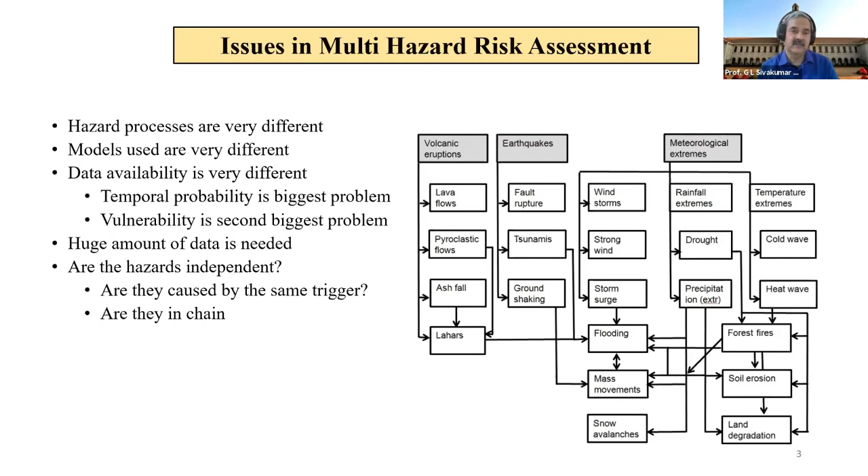There are also some issues like, are they independent? Are they caused by the same trigger? I will give an example. Are they in a chain? So there are some issues that we need to talk about.

So people will say that suddenly, whoever has GIS maps or some exposure to geographical information comes up with a lot of maps, which is quite good, because to capture that at different scales, we need them - to understand how many people, how much of the population is exposed.

And we always look at risk, right? So risk is actually expressed in terms of the hazard, and then the vulnerability, into amount. So, for example, you can talk about risk due to COVID - how many people are exposed, or how many deaths are happening.

So we know that COVID is a hazard, so you don't go out - the government of India has given so many guidelines. But how many are vulnerable, like people who are going out to stay outside or traveling a lot - are they vulnerable? And then the amount - how many people are exposed to that, or what is the loss. In fact, it can be expressed like, if this happens, how much is the cost of hospitalization, or if you're talking about a landslide, how much is the cost of reconstruction, repair, and all of that.

Our objective would be to reduce the risk as low as possible. That's why we call it the ALARP principle - we use it in many countries like Hong Kong and many places. Even in dam analysis it is there: risk should be as low as reasonably practicable. So in this context, we need to develop risk curves.

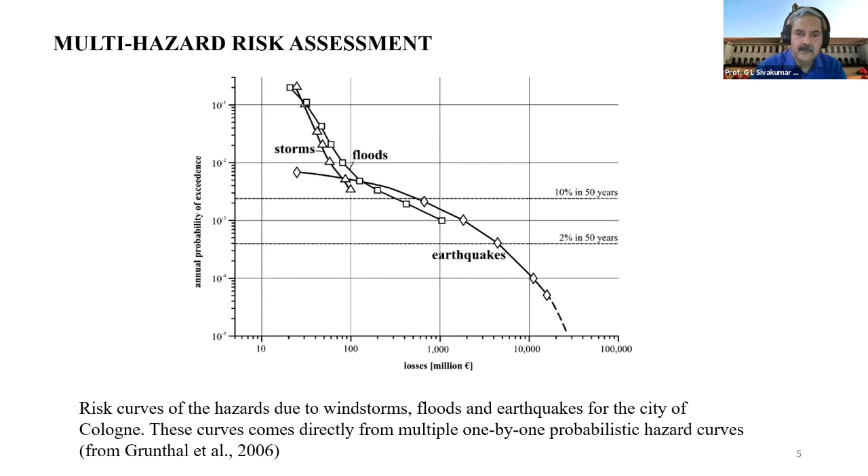So this is one important thing. As I said, multi-hazard analysis is the implementation of methodologies and approaches aimed at assessing and mapping the potential occurrence of different hazardous events in the region - say a particular district or a particular state.

So how do you handle them? As you just mentioned, concepts like probabilities are quite important - the probability of a damaging event. Suppose hazard 1 occurs, does it lead to hazard 2? If they're independent, the probability of damage is a function of the two individual probabilities - the occurrence of a particular damage and some other damage. It can be something like that.

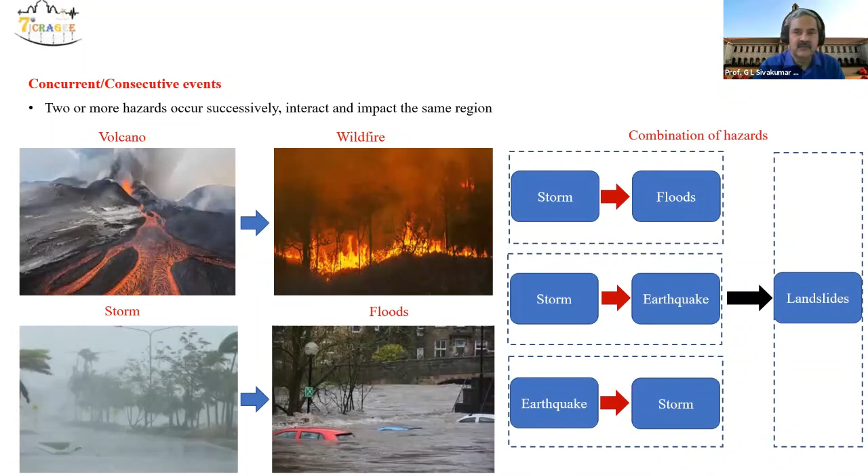One can, because we need to assess the overall damage - that is the important thing. I can give a lot of examples: there is rainfall, but what is the probability of road damage? Like we see in Mumbai, a lot of flooding, even in Bangalore, we see a lot of inconvenience to the public, then associated losses. If you want to understand those things, these are the only ways of understanding. We can give a lot of examples of storms and floods - storms and earthquakes, they lead to landslides. That's one thing.

Students of engineering, at least by second or third year, know about the dependence of events and intersection probability. The probability of damage given that an event has occurred—what is the probability of loss? How much is it? We want to minimize that.

Events do happen in nature, but how best we are ready to counter these issues and minimize damages is our challenge. Given that something is happening because of natural forces, what's the probability of minimum death? Like we've seen in Orissa, storms do occur, but the damage is there while loss of population is minimum. Because of periodic storms, Orissa government has achieved very good success there, due to the prediction models they're using.

So the problem is that most risk assessment is done separately. That is a big problem. In the Indian context and many places, we understand the person working on landslides only works on rainfall-induced landslides. Somebody else works only on earthquake-induced landslides. They don't work together—I mean they may, but our interest is that if you want to address the need, we have to really correlate them properly.

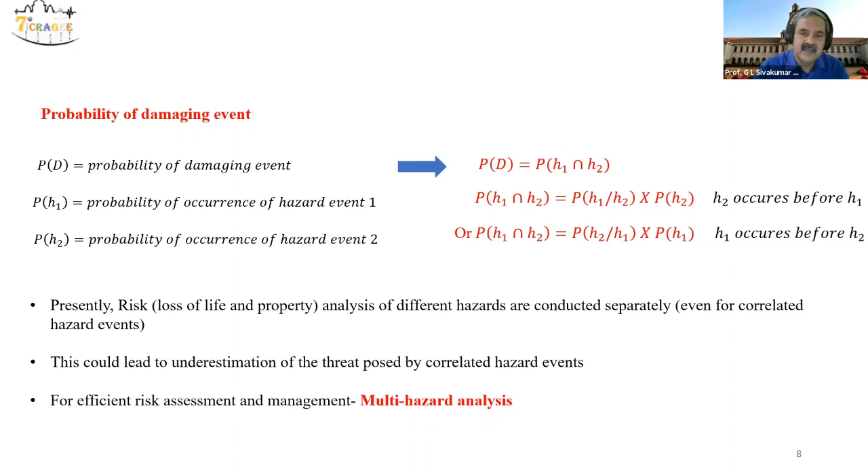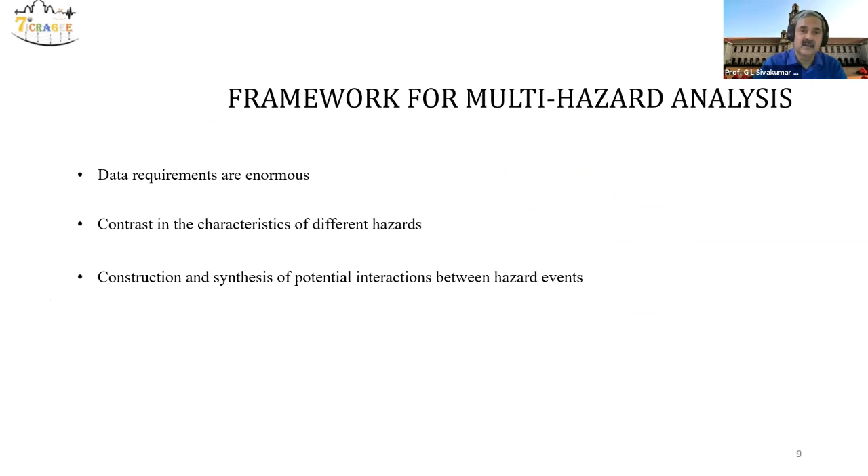For efficient risk assessment, you need to really understand multi-hazards. Data requirements are enormous, contrasting with characteristics of different hazards, construction, synthesis of potential interactions. Interactions are quite important—how do you minimize them?

There's a level 1 where, based on case histories of hazards like landslides, earthquakes, flooding, you try to categorize. The government should do it, and engineering colleges should do it. Nowadays we have IITs, and CBRI must be doing a lot on this.

So if you have the data, you can go for quantitative or qualitative approaches—that's what many people have been doing. But they should have longer scales. Then quantitative approaches are also important. We should do calibration, then understand hazard interactions—that's another important complex thing.

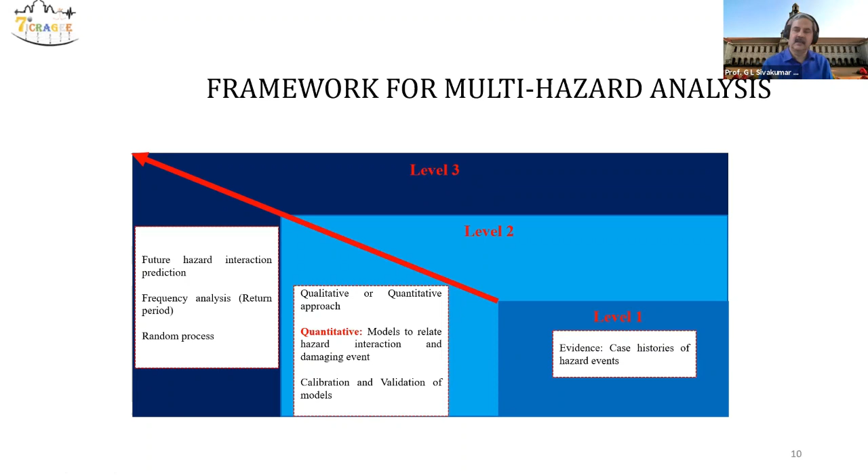Level 3—this is level 1, level 2, level 3. You must be able to understand the return period of different natural hazards, which are all random processes in time. What is a problem in a 15-year return period versus a 100-year return period could be completely different. I'll be talking more on landslides, giving some examples.

As I said, for slope stability analysis I'll give first a simple example, then a case study. Slope stability analysis normally considers earthquake and rainfall separately, and in fact we don't even analyze rainfall-induced landslides with proper data.

I have seen it in the ministry, I have been telling them that's not correct. And even we don't teach them properly—that's, I think, the problem lies with us. The important thing is we have to consider the processes rather than a single event to avoid underestimation, because that is important.

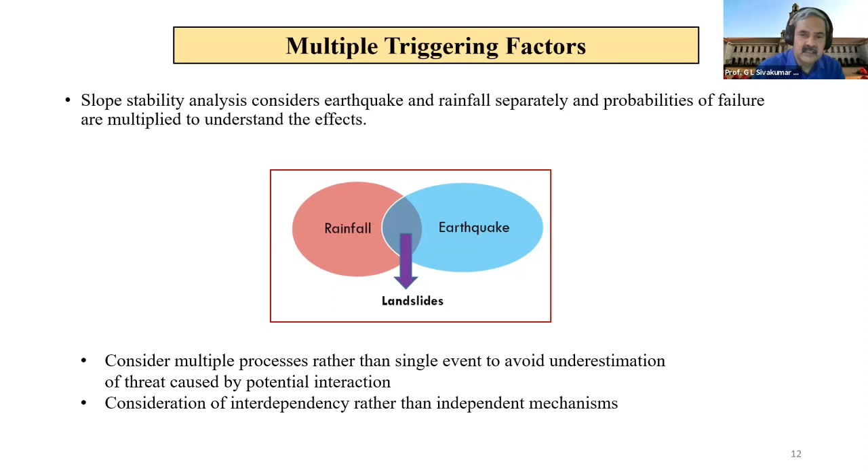I have seen in Sikkim and many places—I think Professor Kanungo is here—many cases where there is some earthquake, something else happens, then you can't do anything because the risk is so high.

So there is a conditional probability of slope failure given that the earthquake has occurred. This is a simple probabilistic statement that the factor of safety due to rainfall is less than 1, given that it has survived the earthquake. It has survived the earthquake, but then when rain comes, it fails. So one can have a simple expression based on the probability, and we're trying to look at it.

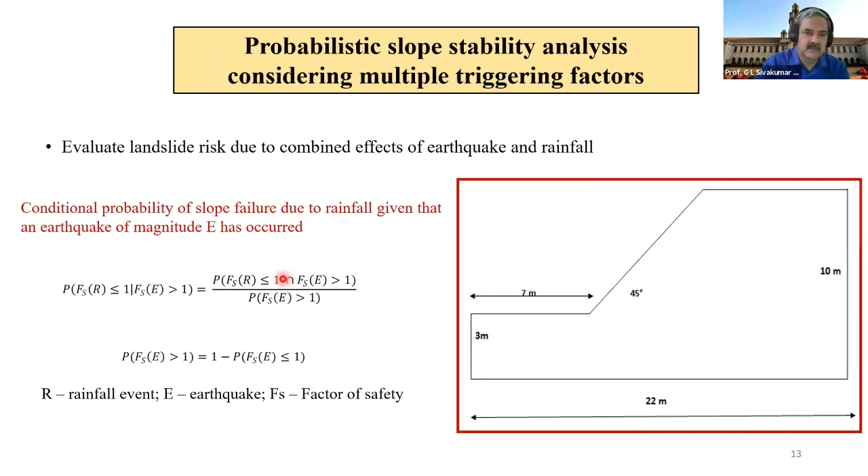So if you analyze these sort of cases, given a simple slope, we can do a simple pseudostatic analysis for earthquakes and infiltration analysis. The important thing is the intensity duration IDF relationship, which we need to borrow from hydrologists.

This is a small example I was trying to construct to understand this. What is important is you have to understand, based on the IDF relationship for a given data, 2 years, 5 years, 10 years, these are the intensities, because higher intensities are expected when the return period is quite high. So then we need to evaluate. I was trying to apply this for some given soil properties.

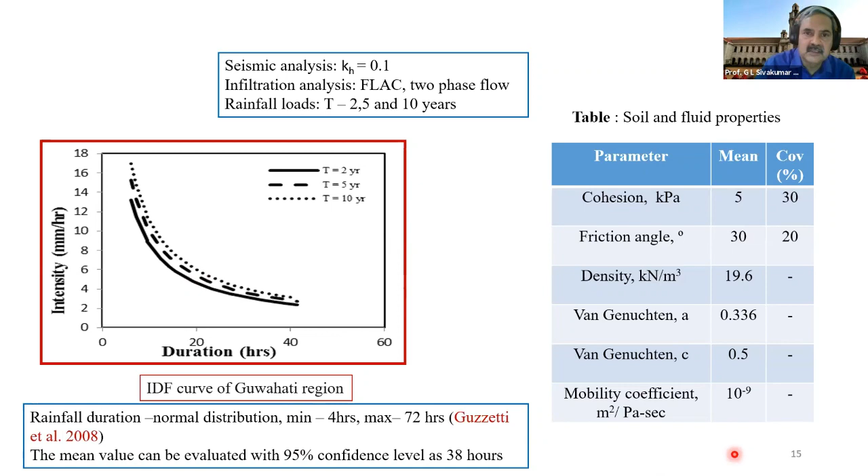What I just want to tell you is that, unfortunately, we think about a factor of safety of 1.3 in slope stability and even landslides. Somehow somebody has given that number, and it is actually wrong. You cannot say the factor of safety should be 1.3, because it actually depends on the variability of factor of safety, which is a function of the variability in C and phi. So suppose the variability of C and phi is high in a landslide area, and the variation of factor of safety is 100% or 50%, I want at least 1.5 or 2. I cannot say 1.3.

That's what I just want to say. What is the minimum factor of safety that should be used? It depends on input parameters. That's what we do in electronics, signal to noise ratio, all of that. So here's an example I tried to construct.

Depending on the earthquake, if it comes independently, or for different return periods, one can construct probability density functions of factor of safety. Like 2 years, 5 years, you can see the earthquake effect here, but then as the rainfall comes in, it shifts to this side, and after 5 years or 10 years you can see there's a PDF of the factor of safety.

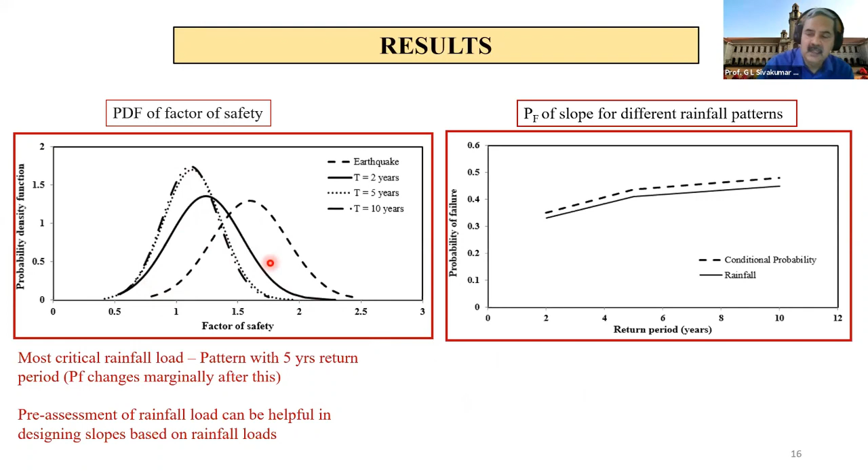So one can plot some sort of relationship, and this is just to illustrate that the return period has a significant role to play. We ideally want to consider the PDF that is common to both, or least affected by both. You can see that because of the earthquake it is one thing, but because of rain it gets shifted, combined, since I modeled both earthquake and rainfall.

So then what is the slope angle? In landslides and similar cases, you'll have 30 degrees, 45 degrees, just to understand how the slope angle matters. The slope angle considerably influences the outcome, and we know that, but then you can identify what probability density function should be considered.

Why I'm telling you this is that once you have a combined probability density function, it's easy to plot the cumulative distribution, that's what we do in concrete design and so on, and find the probability, 95% chance, 5%, or something. You can even plot what should be the critical slope angle at which it may become more hazardous. For example, in the same area on a 1 kilometer road, the angle of the slope varies, it's all debris, as we have seen in the Himalayas.

It could be a debris of say 4 or 5 meters, and it varies along the length, but it only fails at some points, not everywhere. So you need to understand this and put it into a proper framework.

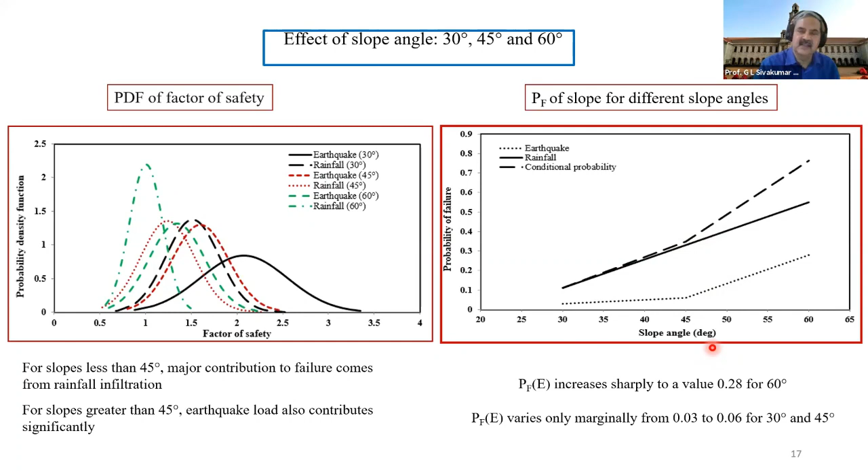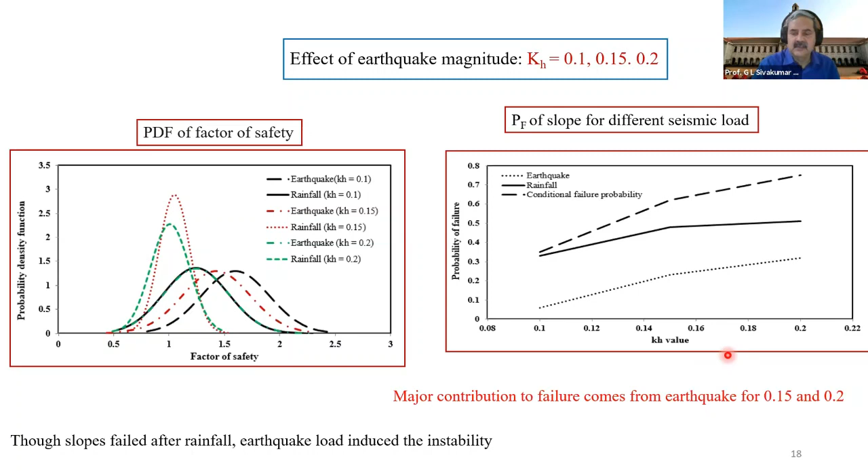This is some example of the seismic effect, the KH value or whatever, just to construct an example.

So what we did was try an example in Arunachal. As I said, Dr. Pinom is very good in this, she belongs to Arunachal Pradesh, so she was trying to do this. And of course the Tawang Monastery is a very popular destination, whoever goes, it's a very beautiful site.

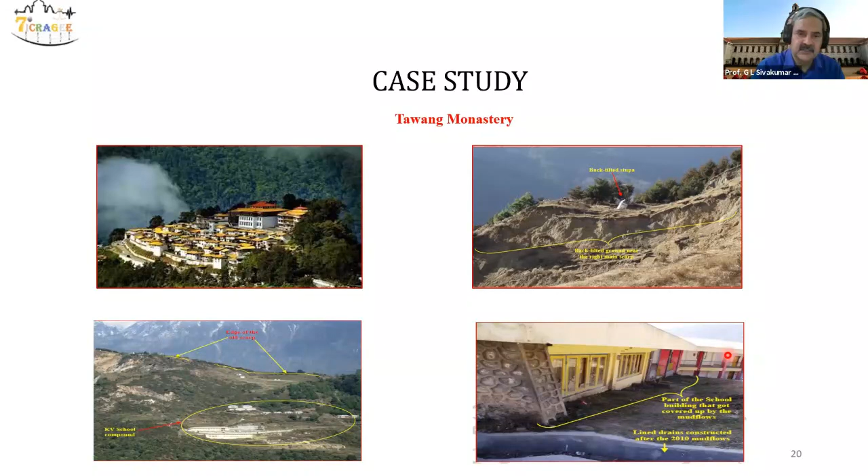And it had some problems, so a lot of people contacted us, and we're trying to understand, at least from a research perspective, because it's not easy. There are a lot of slips, a school is affected, and all of that.

So the task was that the first important thing is that we should be able to get the relationship between rainfall and landslide occurrence. We have what is called a FLaIR model, which is quite popular and used in rainfall studies. So you have an input rainfall, and I'll show you.

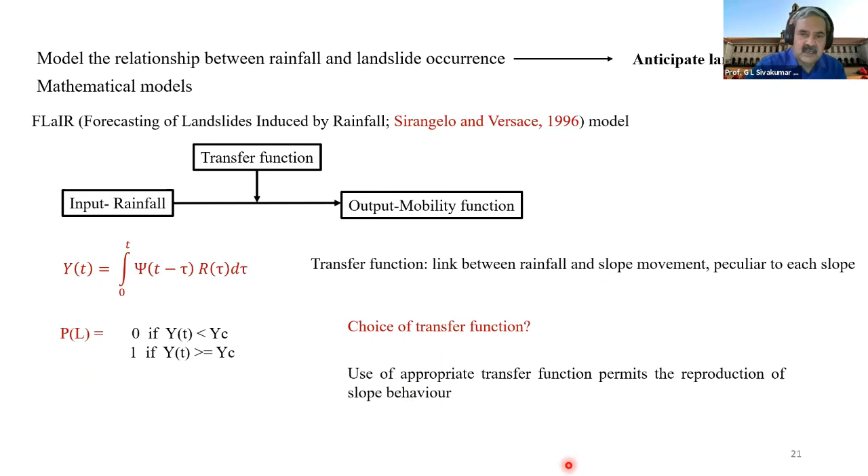You have a transfer function which will tell you the link between the rainfall and the slope movement, meaning whether the slope fails or not. So then there are a lot of transfer functions, I'll show you that example.

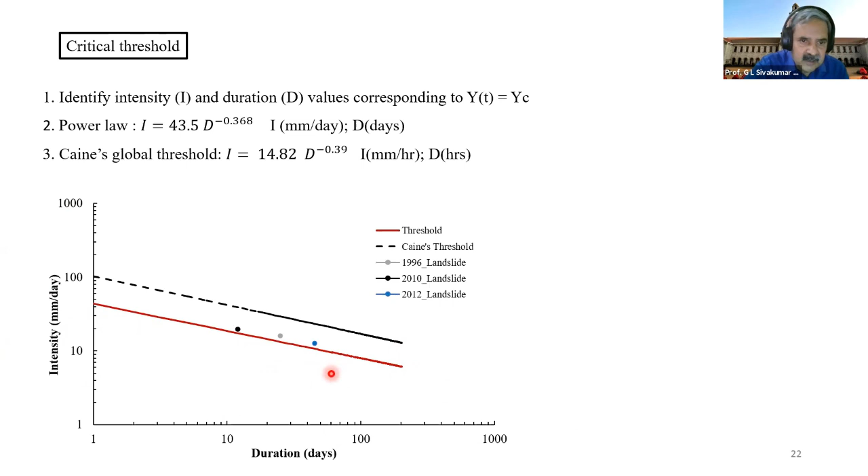You can see this other threshold that we predicted, for which you need the intensity versus duration rainfall data. Then you plot the number of instances observed. You have 3 here, so you're able to see a reasonably exact match. So this is what it is.

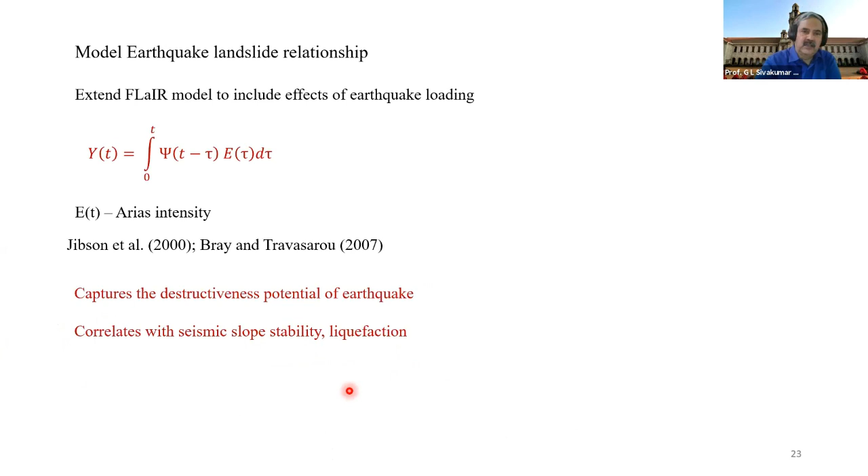The similar thing can be done for earthquakes as well, or for any other hazard, by tweaking this model, because what you need is data. There is similar data available, and we tried to use the Arias intensity because it captures the destructive potential of the earthquake better, and there is a correlation between seismic slope stability, liquefaction, and all of that.

So we got the given data in Arunachal, some data is there, and we put the data in. We did this and constructed this sort of relationship based on the data.

The rainfall, alpha, the parameters - we fitted a distribution. You have normal distribution, log normal, gamma distribution, and all of that. So if you put a gamma fit distribution, you get the parameters for that, and so for earthquakes and landslides, we fitted that distribution.

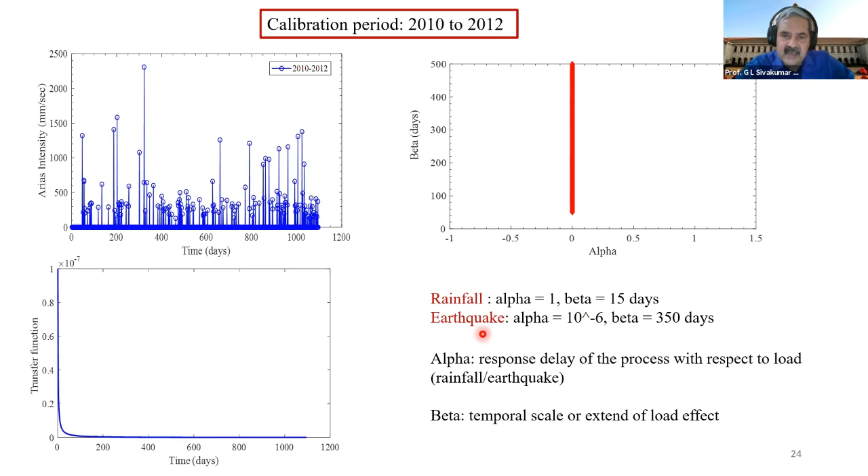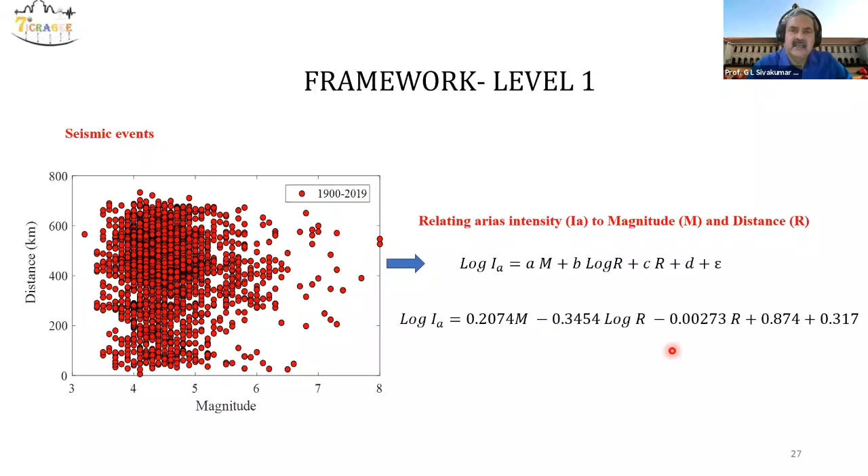They have some meanings also, and this is some data for earthquakes. So these are all some work that we did, repeating because I didn't put it in the way that I wanted.

So this is what I was mentioning, that transfer functions have to be developed, and develop those thresholds the way I showed, for when an earthquake or landslide is going to come. You can use this sort of thing in actual early warning systems as well - these threshold functions and relationships will be quite useful in development of early warning systems.

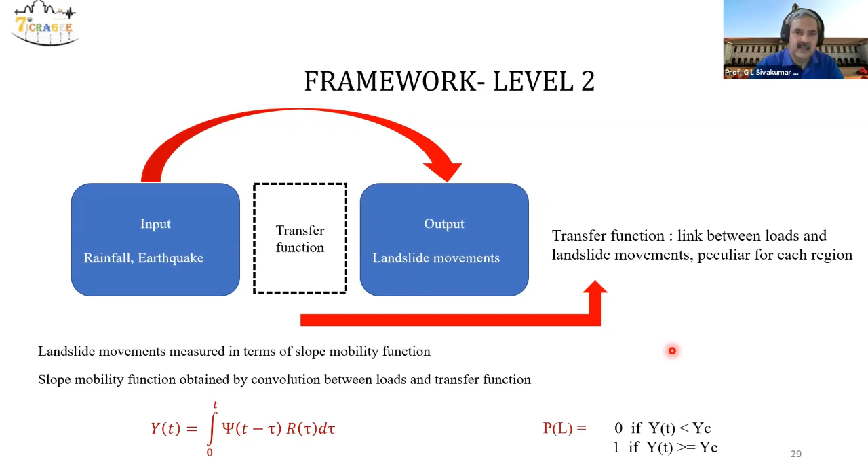So this is the same thing I just mentioned, the slides are a little jumbled up. These are all the different transfer functions, like rectangular, which we assume, then exponential. There are different patterns that we see in nature, and all the distributions follow certain natural patterns.

And so the gamma distribution, as I mentioned, has certain parameters and all of that, and you will get the parameters. Once you get the parameters for any hazard and its return period, you can use that.

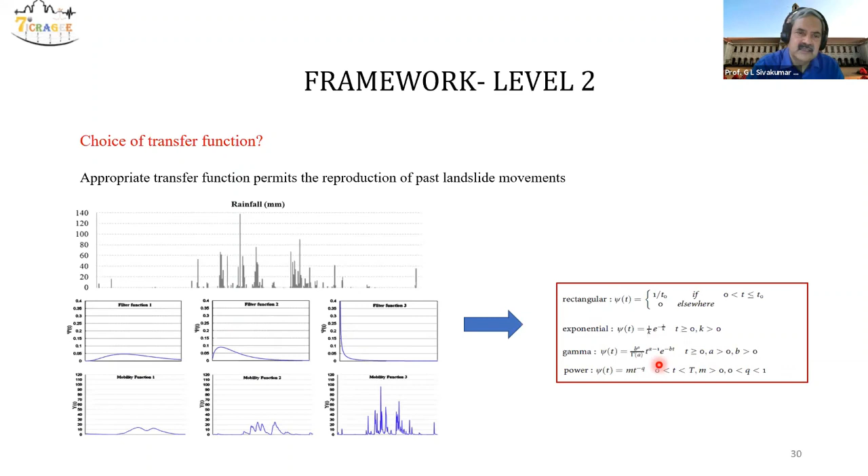That's what it is, like the fitting and all that. So this is what we are trying to do here.

A lot of work is already available on this, and one can understand it from the literature. One important thing we tried to see is that if you have all the data collected, how do you say the data is only because of rainfall, or only because of earthquake, or because of both? Because that's what multi-hazards means, right? We need to come up with some understanding of this, so this is what we did.

So we are able to understand that the landslide data that occurred in September is only due to rainfall, this one is rainfall and earthquake combined, and so on, based on use of these things. And I was also talking about the interactions.

The interaction is, as I said, about when it is going to happen. If there is a lot of difference between the two events, they can be considered independent. But if they're very close together, then, for example, based on the data itself, one can say that if the time period between the two events is more than 15 days, then it's independent.

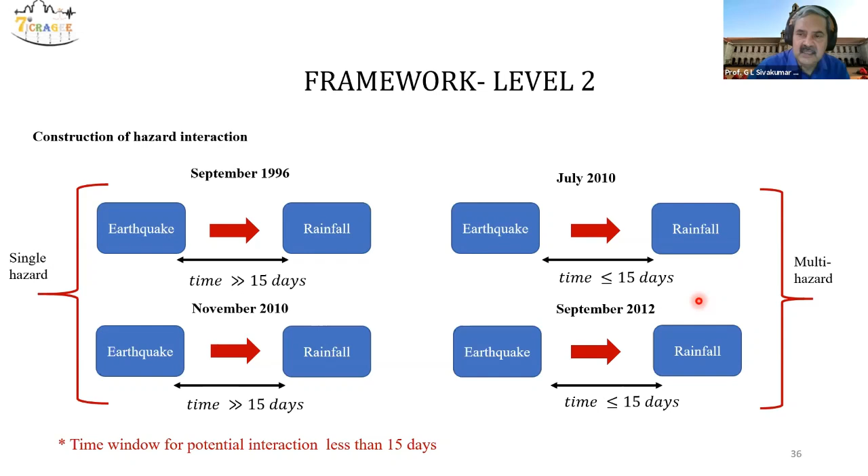It could be different, but you can say that if it is less than 15 days—like, first an earthquake occurs, then rainfall comes—and if the time interval is shorter, you can say there is a lot of interaction, because these things are also required.

So to understand these things, what we should do is model all of these rainfalls and earthquakes as a random process, a Poisson process, because if you don't know much information, exponential or Poisson process is okay—that's what we do for earthquakes. So we try to set a time and identify the rainfall and earthquake events corresponding to the mobility functions which are greater than the critical value, then calculate the probability of landslide triggering from rainfall and so on.

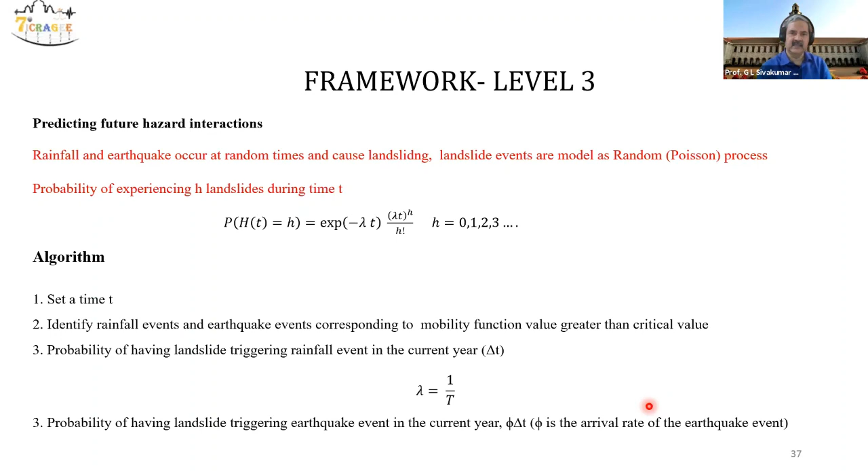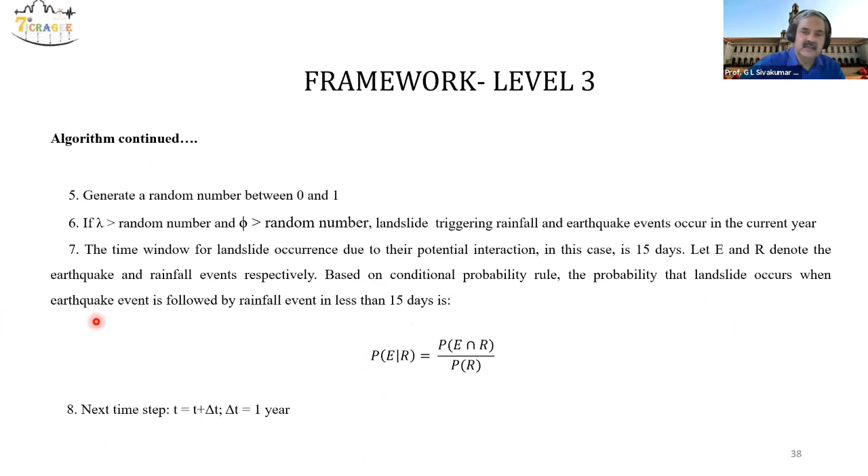So what I want to summarize is that we have to understand multi-hazards is a complex issue. It can be extended to many hazards, many real-life problems, including the inaction of the government itself, because we have seen, for example, Mumbai has a lot of flooding every year, but no action.

So our interest, as I said, was to reduce the risk. If you don't reduce the risk and don't understand the risk, then I think people say the government is not acting. But unfortunately, that system is not there—you want to upgrade the infrastructure. That is a way, since the hazards do continue to come. So how the governments can implement this is a nice thing to consider.

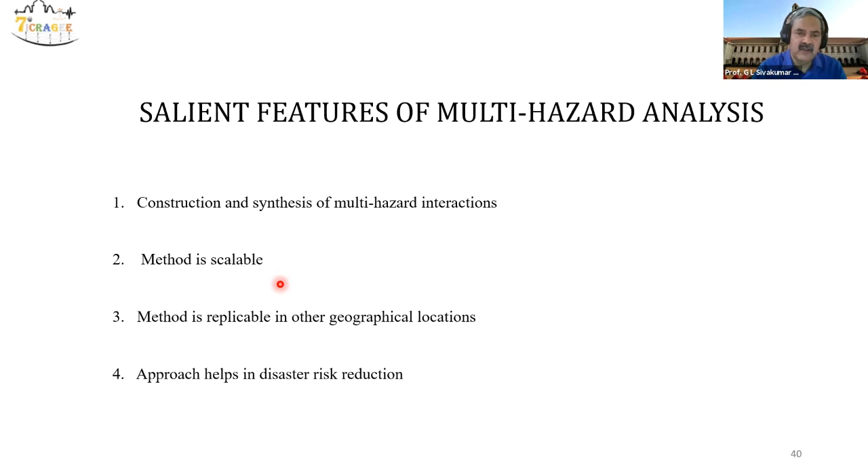The methods are scalable—you can apply them to many things, to anything. The methods can be understood and extended in many ways. It's just an idea, but there are a lot of things one can do, and these approaches are very, very much required, particularly when handling disasters. Thank you very much.

So thank you, Professor Babu. This is really a thought-provoking lecture, and it exactly took 30 minutes.

Yeah, I can't take risks, sir. I can't take risks. Yeah. When we have such a distinguished speaker, he has that quality of maintaining the time exactly.

So I think this is the message for the younger generation—time is important, so we should stick to the time.

Through this very important lecture, he has identified many pertinent issues, like big data involvement in multi-hazard framework or multi-hazard analysis, and the problem of data availability in the Indian scenario, as well as globally. And he has introduced the multi-hazard concept, and he was absolutely right in saying that we always look at a particular hazard separately rather than combining different hazards or considering the interaction between different hazards in having some risk involved in it.

And the concept is one hazard leading to another hazard. Like if there is an earthquake, then there can be co-seismic landslides, then landslides can formulate a landslide dam, then we can expect flash floods. Due to flash floods, then connectivity failure, whether it is internet or electricity or transport network. So a gamut of things involved in the process. One triggered, and many things triggered, and finally the risk is to the population in terms of connectivity failure and all those things.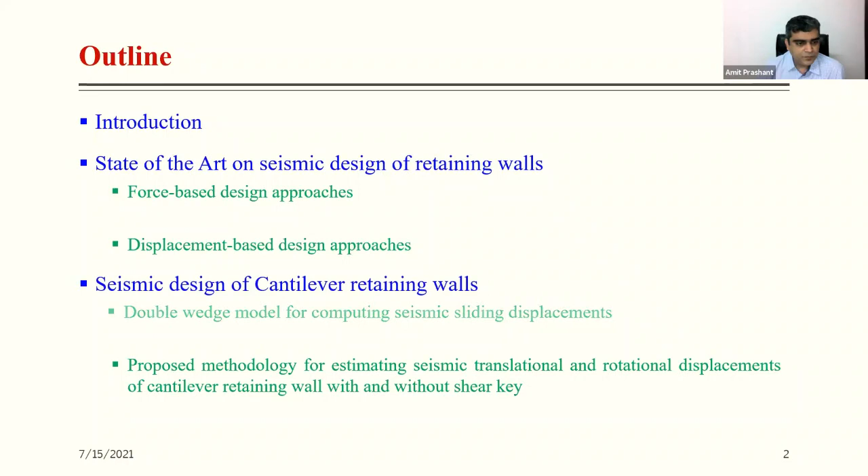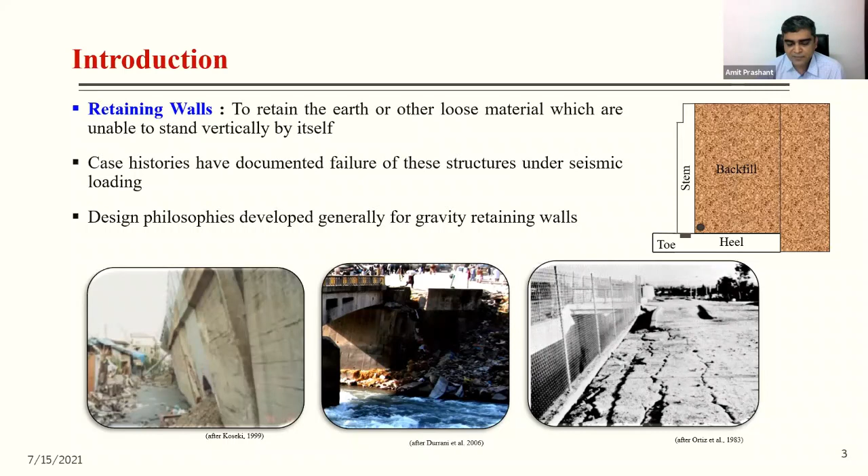As we know, there are so many failures that have happened in the past, and most of the events of failure have occurred because of some major displacements or some kind of failures that have caused even other triggered failures around the structure.

So the focus here will be on estimating how much damage is acceptable and how we can assess that. Depending on how much we can allow as deformation, we can set with respect to seismic events how much tolerance we can have with respect to the structure's response.

And that depends on what is the importance of that structure, and also what is the role or function of that structure. So whether we want to have just life safety protected, in that case we can go for higher displacements. And if you want to make it almost a no-damage condition, then of course we have to allow only less deformation.

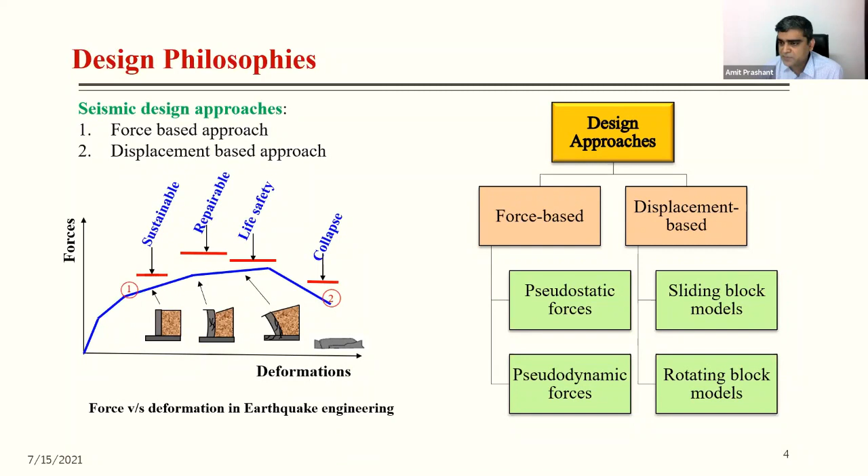So for design purpose, when we start the analysis, first we go to static design, where we talk about the force-based approach, mainly checking against sliding, rotation, all those that we learned in our undergraduate courses. Then when we come to seismic, mainly we talk about displacement-based designs. And what is the status of that? That we will see briefly.

For force-based design, we have generally used the pseudo-static approach, which was proposed almost 70, 80 years back. And that is still in use and very much applicable today. The challenge has been finding the coefficient that we use for performing the pseudo-static design.

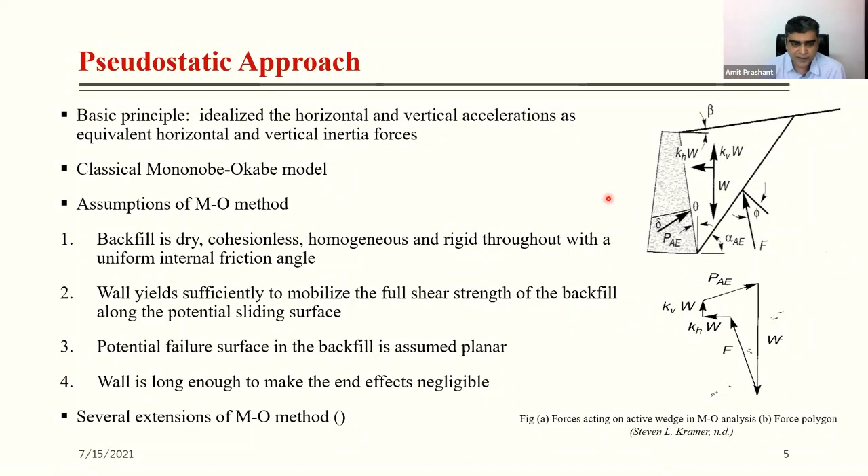And with that, there will be vertical seismic acceleration KV added as well. So if we have these two accelerations, one in horizontal direction, one in vertical direction, we can use almost the same method as Coulomb's method for analyzing this. In Coulomb's method, you had all the acceleration acting vertically. In this case, it will be a resultant acceleration acting at some angle, and we can assume the reference has rotated. So the analysis is almost the same, there is no difference as per se.

There is another effort that has happened in the last 20, 30 years to have a pseudodynamic kind of formulation. The difference mainly is in the assumptions that are taken.

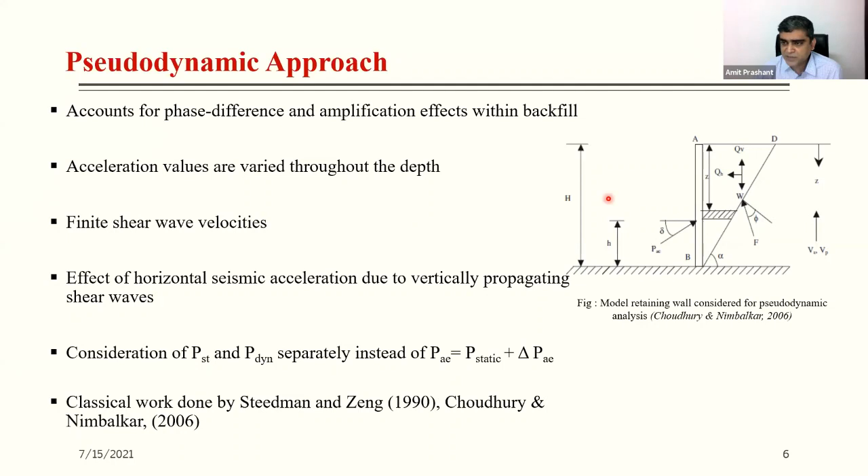In the pseudostatic approach, we assume everything to be rigid and the formations are just moving along the surface. While some assumptions are valid here, there are further conditions applied with respect to how the velocity and seismic forces are going to vary from bottom to top, and also how we estimate the dynamic component of the earth pressure acting on the wall. So there is a slight difference in how we treat the forces into the wall.

As far as displacement analysis is concerned, it is mainly focused on the more traditional pseudostatic approach, converting that into the estimated displacement of the wall. In this Newmark sliding block analysis, developed initially for slopes, a lot of work was done in the last 40-50 years to estimate the KH value, which is the averaged value for the moving mass.

As the earthquake waves move into the soil towards the top of the slope, the peak values of those waves are not going to happen everywhere in the mass at the same time. So they will be at different times, or every point in the moving mass in the slope is going to have different acceleration values at any instant. So in that sense, there is an average that you get, and also there is an amplification or de-amplification of the motion involved in the process.

With that, if I assume what the KH value is that we are going to use, I can calculate the resisting force and driving forces as we do for Coulomb's method, modified slightly for Mononobe-Okabe to be applicable. So that is the first step.

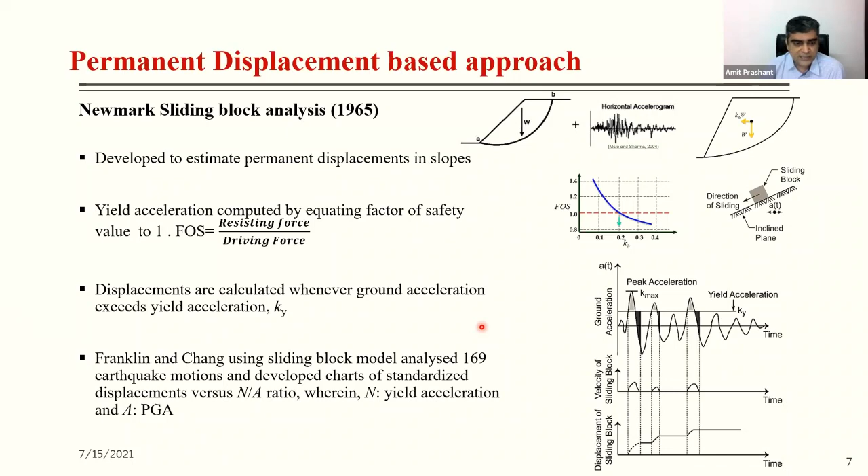That chart can be used with the x-axis being N by A, where N is the yield acceleration, which depends on the geometry of the slope, and A is your PGA, peak ground acceleration. With that, you can estimate how much the displacement is going to be.

Later, it was modified by Richards and Elms for gravity retaining walls. Basically, the idea is almost the same — the only difference here would be the earth pressure acting on the wall. So it was modified from slope concept to retaining walls, mainly gravity walls.

More or less the concept is similar, but based on the response and different earthquake characteristics, they proposed certain correlations and a process to find out, by iterations, how much the displacement should be for a given peak ground acceleration and geometry of the structure, or the other way around — you can assume a certain acceptable displacement and find out what the mass should be, etc. So it is easily extended from the slope concept to the gravity wall concept.

Then there is another study later by Whitman and Liao, where the Richards and Elms design was further extended by certain assumptions to be relieved for wall and slope, and also incorporated the tilting mechanism partly into the system.

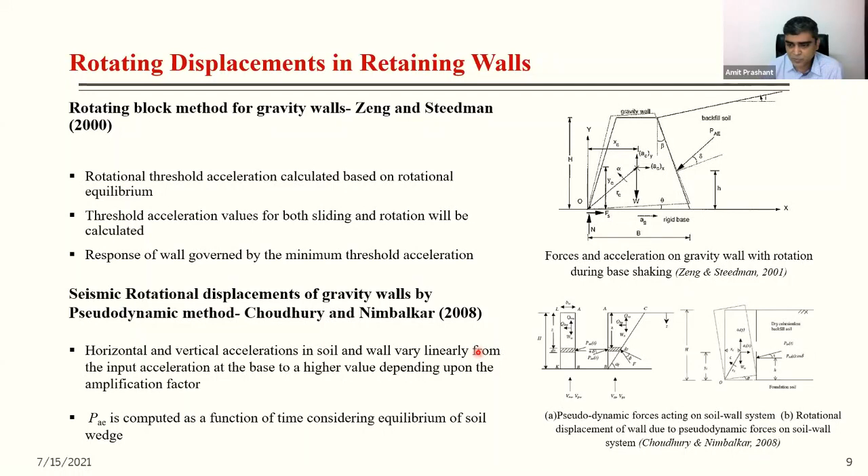The pseudodynamic approach, I think Dipankar's work at IIT Bombay on the pseudodynamic method, there is a lot of work he has done to find out how we can release some of the assumptions from the pseudo-static approach to find a better estimate of the earth pressures.

Going beyond that, if we talk about cantilever retaining walls specifically, which are different from gravity walls, why so? Because there is soil at the back of the retaining wall, and that soil is going to have its own failure wedge, while on the other side there is soil that may be part of the failure as well, and there is distress possible in this zone too. Whether that needs to be accounted for or not, that is the question.

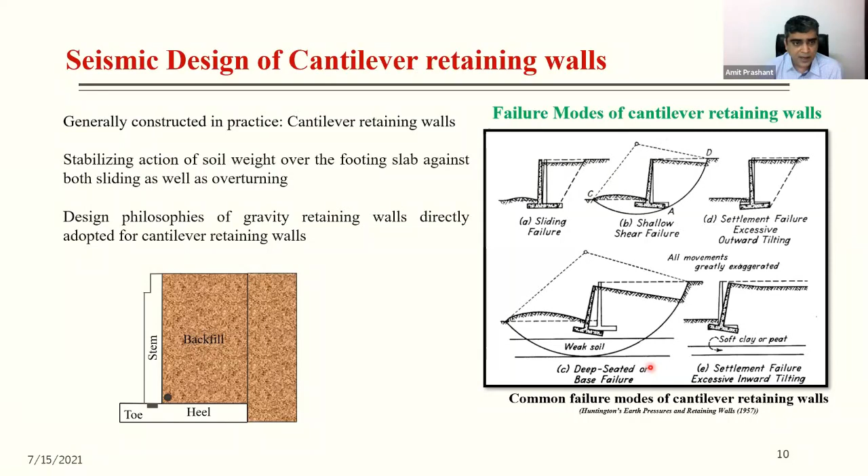There are several failure modes that we talk about, and we check for them one by one in the force-based approach in general. When we come to the displacement-based approach, we will mainly be talking about sliding and rotation.

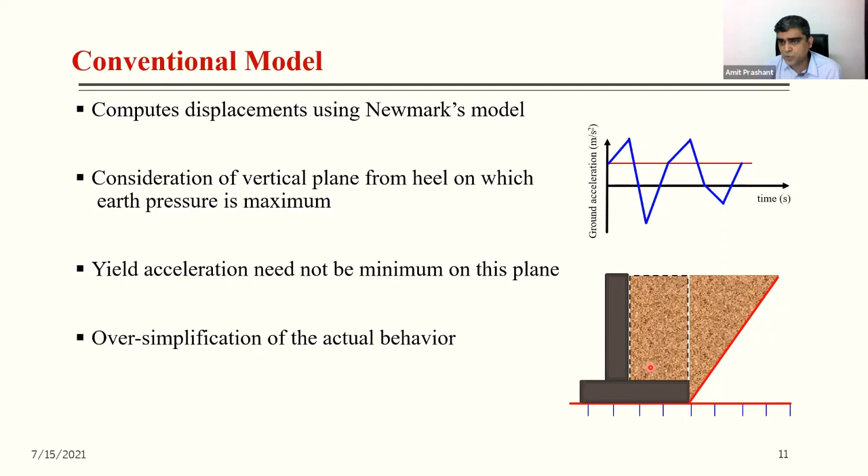The conventional approach, which is what many codal provisions provide, is the extended Newmark's method. That is to say, I had a wall, there was a seismic event, and the wall slides on the ground. We take the representative earthquake motion. With the geometry of the wall known, I find the yield acceleration by performing the Mononobe-Okabe type analysis for factor of safety equal to 1. And the same kind of integration that we did for slopes, I can do for the retaining wall as well.

The assumption here is that instead of a slope, there is a kind of representative gravity wall in place of the cantilever wall, which assumes a virtual vertical plane here. This whole thing is assumed to be one unit, and that becomes more like a gravity wall. Against that, there is a backfill, and that backfill is going to have failure only. So that is the assumption in most of the codal provisions today.

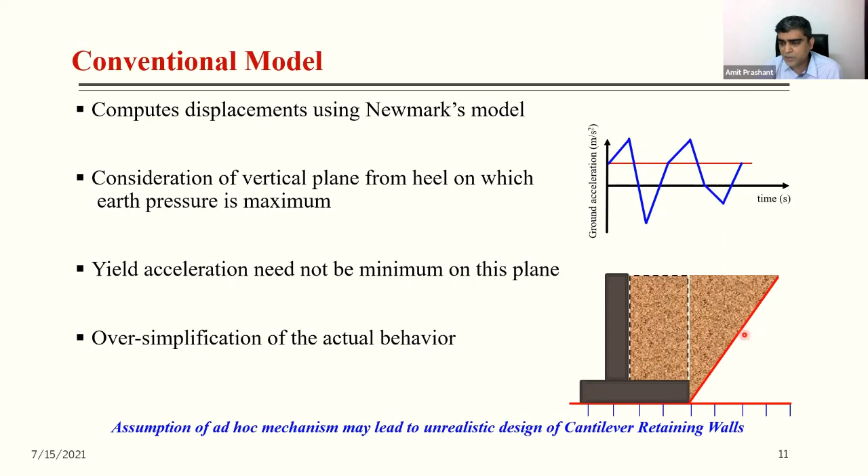Most of the methods that were available until now were making such assumptions. But when we had some experimental studies done, we observed that the failure is not so similar to what we assume in codes in general. The failure is more like a V-shaped wedge, and that will have a lot of different kinds of energy dissipation at the back of the wall. Also, the stability force and the force distribution will be very different from what we assumed according to the approximate, ad hoc method that we had. There are several studies available on this.

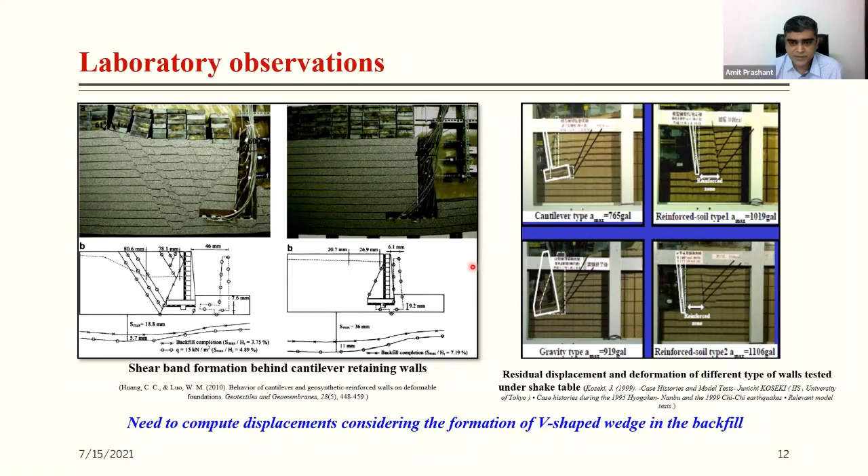Based on this, we came up with a double wedge model instead of a single failure wedge model. This double wedge model basically has an inner rupture plane towards the backfill and an outer rupture plane towards the wall, similar to what we saw in experiments. So if you want to formulate that, what will it take to do for stability analysis?

We have to make sure that this whole system remains in contact under certain conditions. If I look at these rupture planes, they cannot penetrate into each other, so they should have velocity compatibility. Velocity has to match. Acceleration compatibility too, because action is equal to reaction, so normal forces have to be equal in that sense. So there are compatibility conditions that I can apply on each wedge.

At the same time, what I observe is that along the rupture plane, there is a tangential movement that is possible. So if the wall is moving away from the backfill, the wedge can move down. As it moves down, it will be sliding on the inner rupture plane and outer rupture plane. So in the tangential direction, there can be acceleration, there can be velocity relative to the body next to it. These are some of the conditions we use to satisfy and formulate the solution for finding how much will be the yield acceleration or how much will be the sliding.

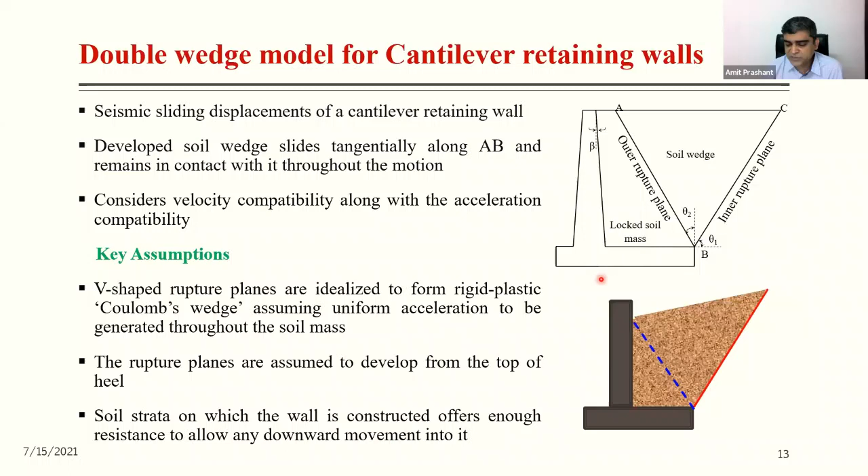The challenge here is that now there are two bodies moving. One is the wall with locked soil mass, that is this part. There is soil which is part of the wall itself, but the wedge is not vertical as we had assumed in the codal provisions. At the same time, there is another mass, this wedge, which is going to move. As per the codal provisions or conventional methods, the whole failure mass is assumed to move together.

But in this case, there can be movement of the wall with locked soil mass, which is different from movement of the wedge. And that is what we expect as per the experimental or field observations. So if I put together all the mathematics behind it, the variables of interest are KH y double prime, the horizontal acceleration for yielding in the wall with locked soil mass. Similarly, for the wedge, I will have KHY prime.

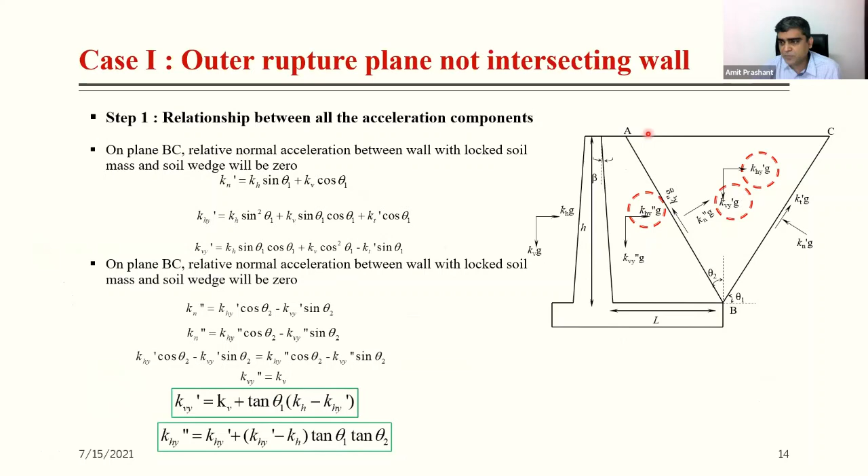These two accelerations are what we are looking for. Another thing to notice: when we talk about the wedge towards the wall, the rupture plane towards the wall, there are two possibilities. One, this intersects the top surface, and second, it intersects the wall itself. These two will have slightly different formulation.

If I take care of all the assumptions and the static equilibrium conditions, it's a pseudo-static approach, so we solve the static equilibrium equations. If I do that, I can get the final solution which provides KHY prime and KHY double prime.

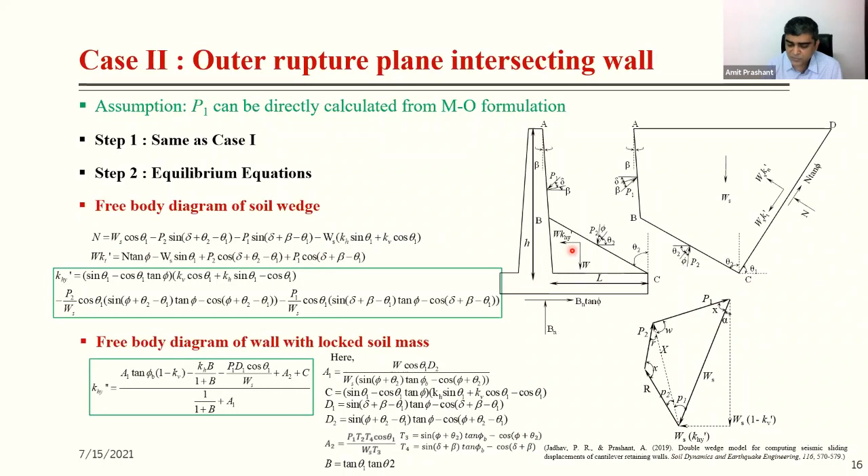Once I have these two, I understand that at the base there will be ground motion, and relative to that, the wall with locked soil mass with KHY prime will be moving. Now I can apply the same integration with respect to seismic ground motion as we were doing for the Newmark method. The only catch is that KHY prime is now a function of the current acceleration as well, because of the compatibility conditions. That's where KHY prime varies at each time instant, while KY in earlier methods was constant.

So that becomes an iterative process. Also, the failure planes are going to be a function of the stability as it evolves based on the KH value. So there is an iterative process that we developed through a code, and we find the minimum KY for the wall with locked soil mass from that.

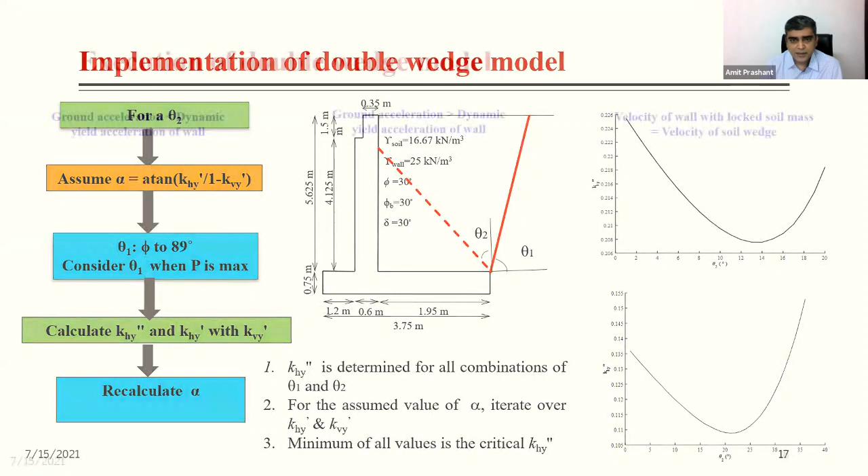So in the end, the execution is basically: if ground acceleration is less than the dynamic yield acceleration of the wall with locked soil mass, then there will be no motion—the wall and the base will be moving together. If it is the other way around, where ground acceleration is more than the dynamic yield acceleration, then some motion is possible.

And if velocity of the wall with locked soil mass is equal to velocity of the wedge, these two blocks are moving together. Then the deformation pattern will be different in a way—it will be pure sliding only.

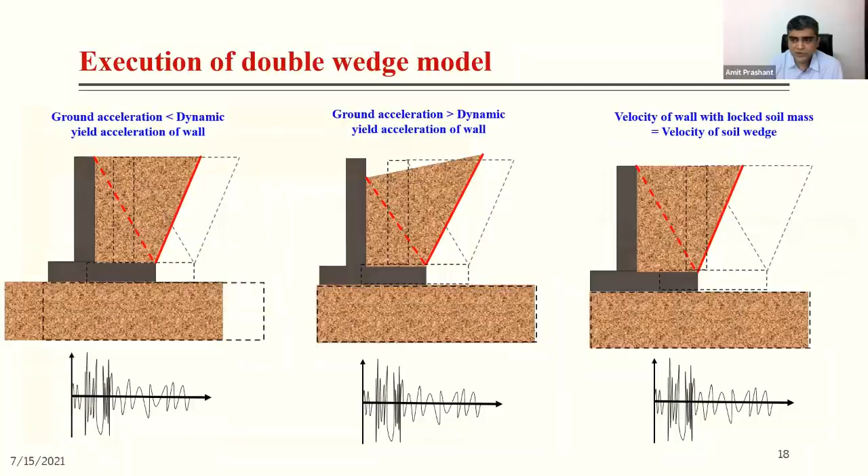Then we compared the model for four different case studies, mainly experimental studies in the lab. We found that most of the cases were predicted pretty well with this slight modification. We also did some finite element modeling and compared the results with respect to that, for different earthquake motions, to see how the response is going to be.

Now, in this process, we look at the displacement in four components. One is delta 1, which is with respect to the free field motion itself, as it happens at the ground. Delta 2 is mainly sliding. Delta 3 is rotational, incorporated in the overall displacement. And delta 4 includes the bending part of the wall height, you can say the stem.

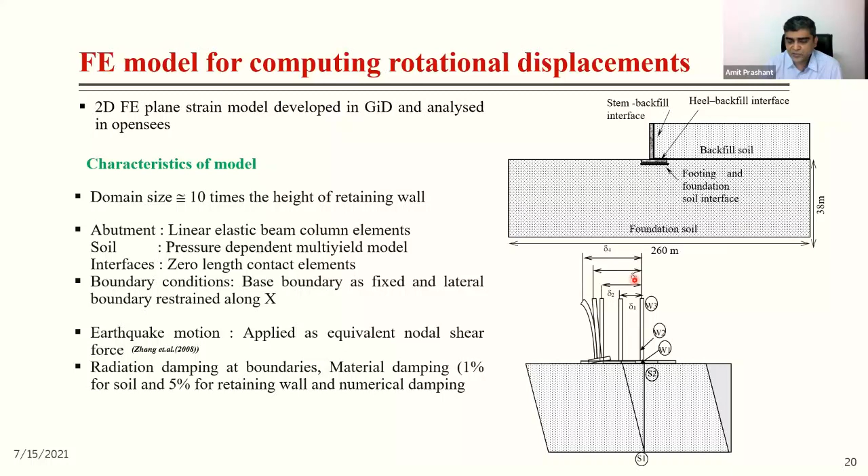So delta 2 is what we calculated from the double wedge model, but overall displacement is what we are targeting. So eventually delta 3, which includes rotational, has to be predicted as well. By performing several analyses for a few earthquake cases, we can find that.

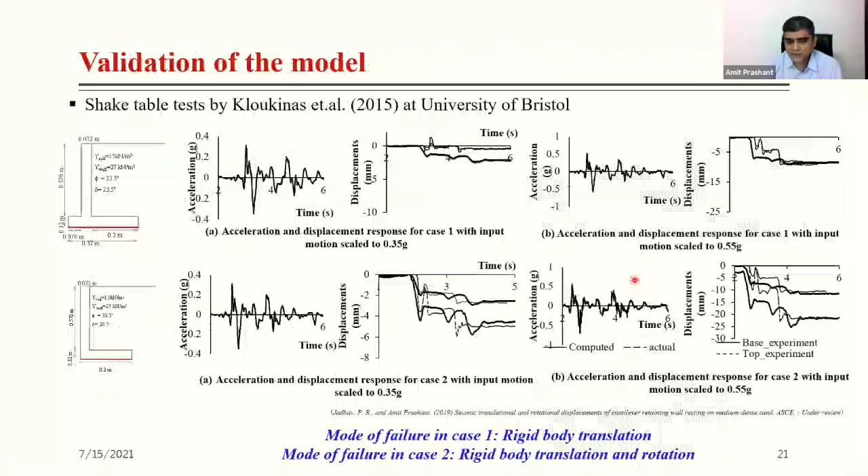So first we validated the FEM model that we developed, then performed the analysis for different foundation conditions. We realized that if we mainly focus on type C soil or type D soil—if soil is very soft, we're probably going to have ground improvement there or some other arrangement to provide sufficiently strong foundation. If we have rock type conditions, there's no major difference with respect to type C anyway. So in that sense, we focused on normal soil conditions as expected in type C soil.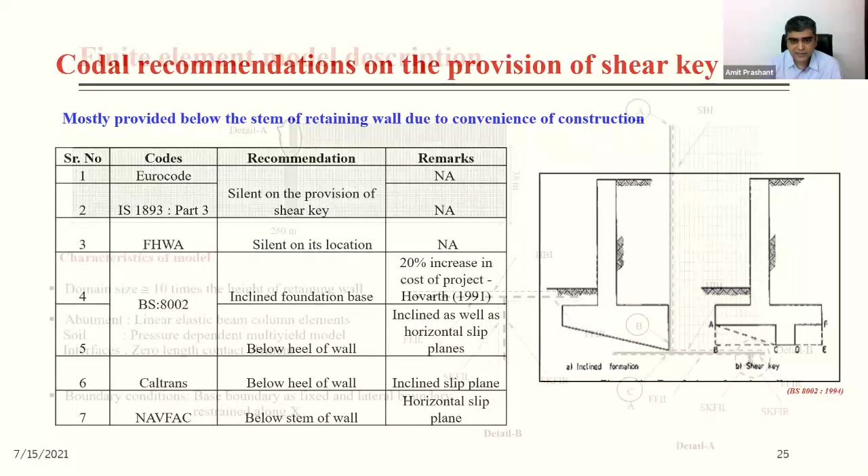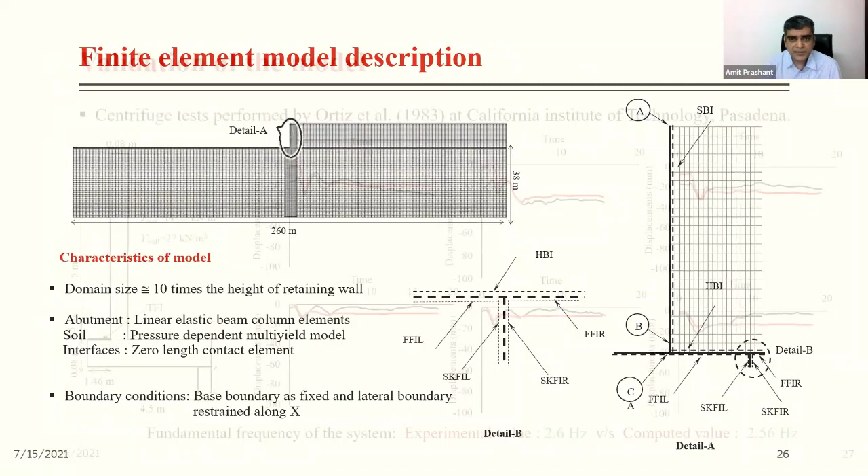Then we have another case where we apply shear keys below the walls. With shear keys, the sliding reduces. We developed an FE model similar to what we had without the shear key, and validated it with experimental studies available from Ortiz. In that process, we also looked at the preferred location of the shear key, and we found that providing it at the heel end is better, at least from a seismic point of view.

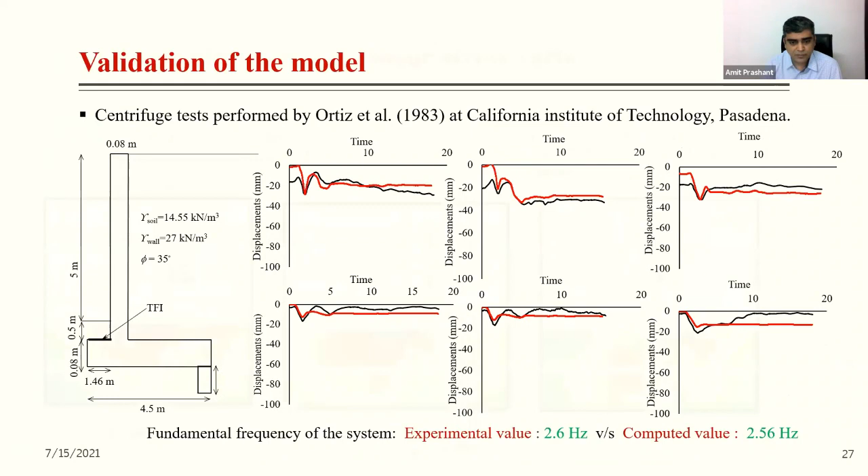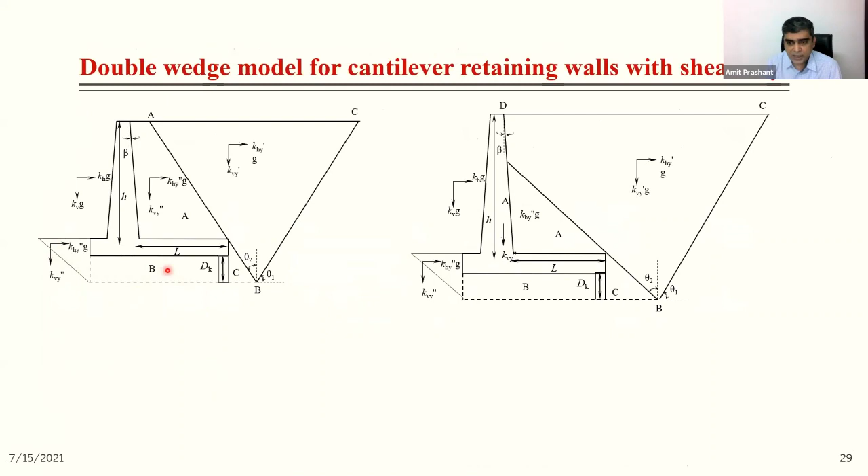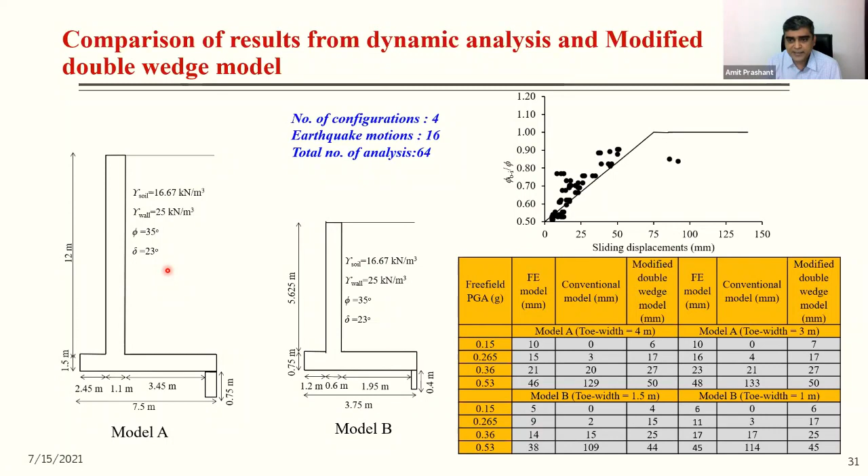With that, we correlated the rotational displacements with around 144 FEM analyses compared with the analytical methods, and proposed residual displacement factors, different factors for finding residual displacement or peak displacement, and peak rotational displacement as well, with and without shear key. These factors can be directly used to find rotational displacement, peak or residual value, based on the sliding displacement calculated from the double wedge model. That way it becomes a simple analysis once you have sliding displacement in hand based on the assumed earthquake motion at a particular site.

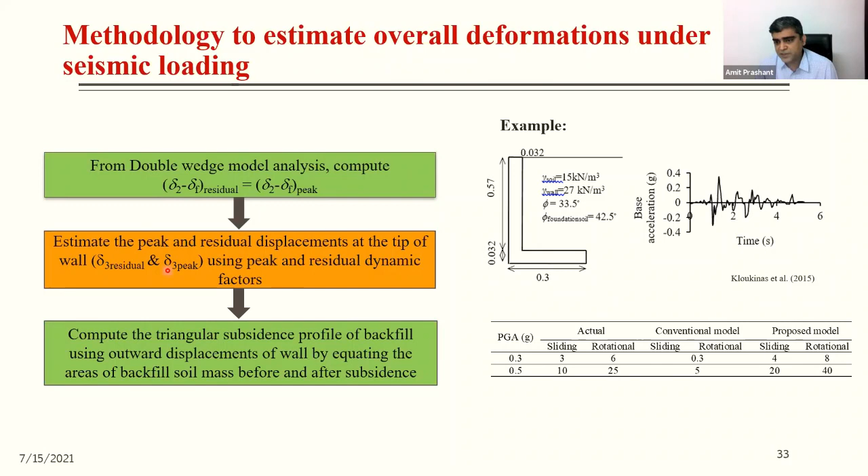We can then use that motion to calculate sliding displacement and use these displacement factors to find the overall displacement of the wall. With that, based on how much rotational or sliding displacement happened, I can also find how much subsidence will happen at the top of the wall. That can be a tool to assess how much damage I can expect in the road or anything on top of the retaining structure. So we can have some confidence in the estimated displacement under a seismic event and how much damage I can expect out of that. That is the overall study.

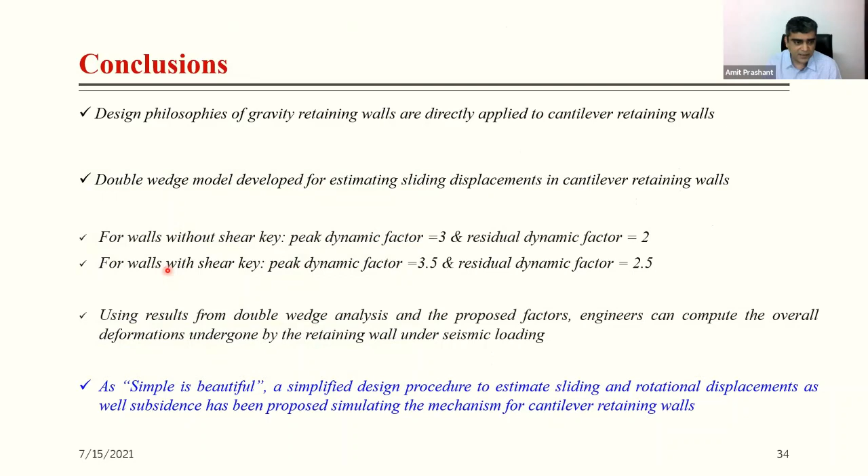I will stop there, and probably if there are a couple of questions, I will be happy to answer.

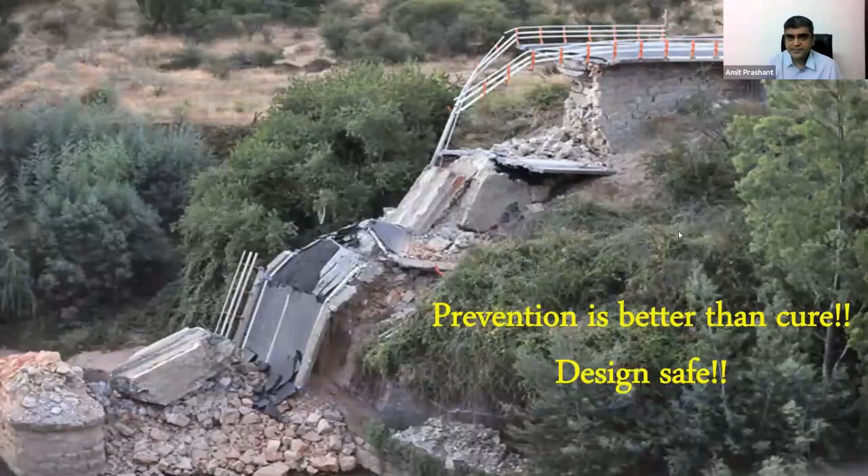Thank you, Professor Amit, for such a nice lecture and sharing your in-depth research on this particular aspect in computing the displacements of cantilever retaining walls. In your lecture, you explained the classical models, then slowly developed your own model and methodology for calculating translational as well as rotational displacement of the cantilever retaining wall, and how to go about the pseudostatic or force-based design, and then seismic design, which is displacement-based design. Though it is not my core area of research, I could get a sense of it because I come across such retaining walls in infrastructural projects many times, and the type of failure, and how to calculate the displacement, and then considering all those, how to design a safe structure, I could sense it very nicely.

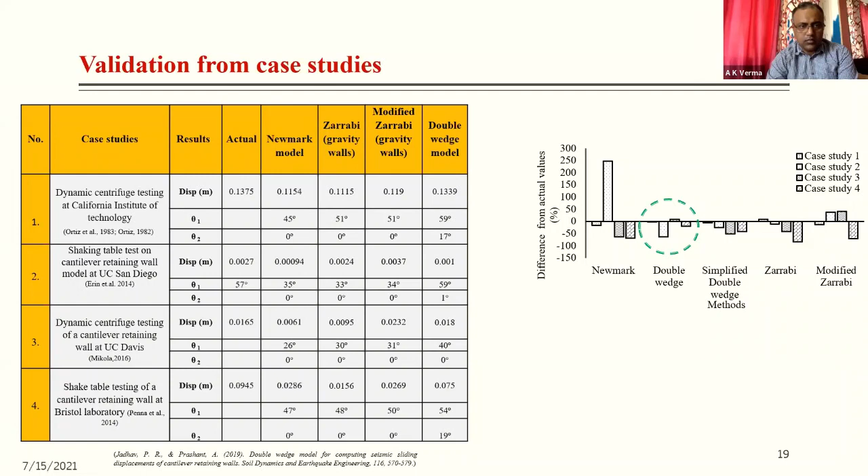I think probably you are referring to this page, right? No, the earlier one, earlier one. Okay, just a second. So this is the first one.

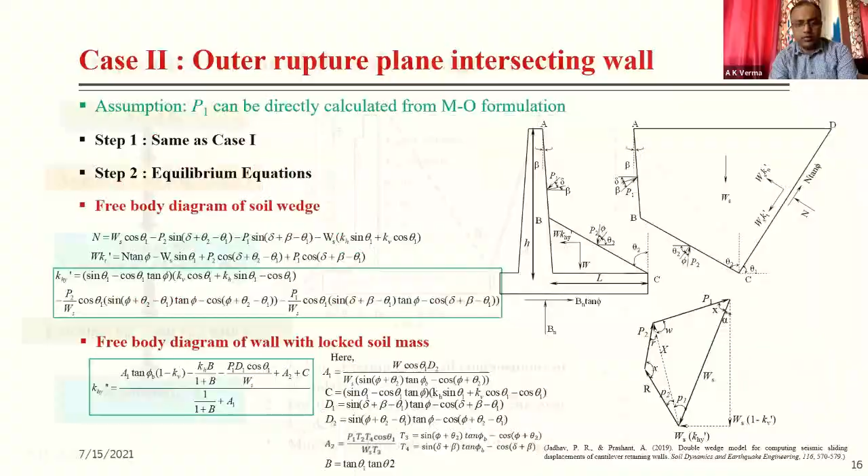Okay, so what happens is when you have very low PGA, right? Any rigid model will not be able to predict that, because when you have very low PGA, it is mainly the rigid part of that rigid plastic model that it will capture, right? And when we start having plastic deformations, only then it will start predicting. So when we have very low PGA, the predictions are not expected to be good anyway in that sense.

And that is where, even at slightly higher PGAs, if I assume this interface effect with an approximation, that improves the results a little bit. So while in the FE model the soil is considered nonlinear and can deform even at small forces in a nonlinear way, so there will be some finite deformation. In any rigid plastic type analytical model, there will be almost zero deformation.

Now, from a displacement point of view, the resolution we are looking for is around 10 mm. It is not really a 1 mm kind of thing, right? So if it is, say, 10 versus 12 mm, I may not care actually. But if it is 10 versus 20 mm, I may care. So that way it is justifiable that the predictions are okay, not too bad.

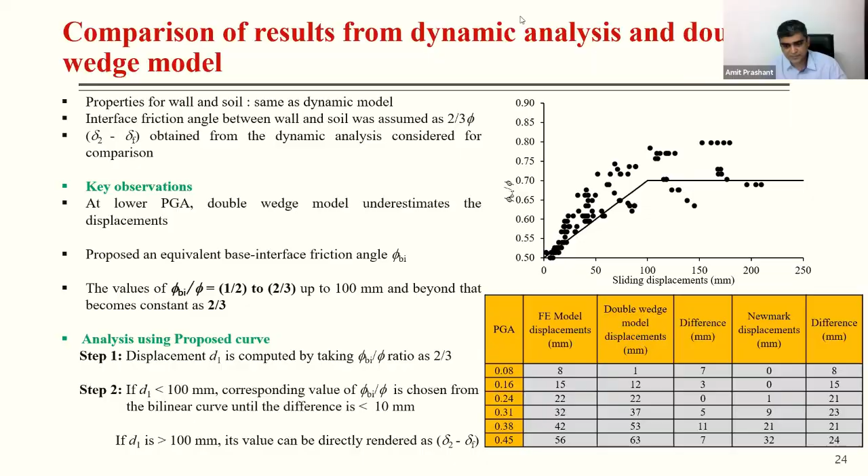So in the FEM model, we have interfaces. I think I have answered all the questions myself. Professor Kanungo, I'm not able to see, are you able to see any questions? No, there is no question in the chat box.

Yeah, absolutely no questions. So I think I must thank both the distinguished speakers for delivering such nice talks, it's quite interesting, and they have explained things so simply. Even in the second talk, though I was not a subject expert, I could sense and correlate it with the real field scenario, what is happening and why this is necessary. So thank you very much once again from my side, as well as from the organizing committee of ICRASI. And I think over to Professor Dinesh, please.

We have come to the end of this morning session, and I take this opportunity to thank the chair, Professor D.P. Kanungo from Central Building Research Institute, and also the co-chair Dr. Amit Verma, on behalf of the organizing committee. Thank you very much, sir.